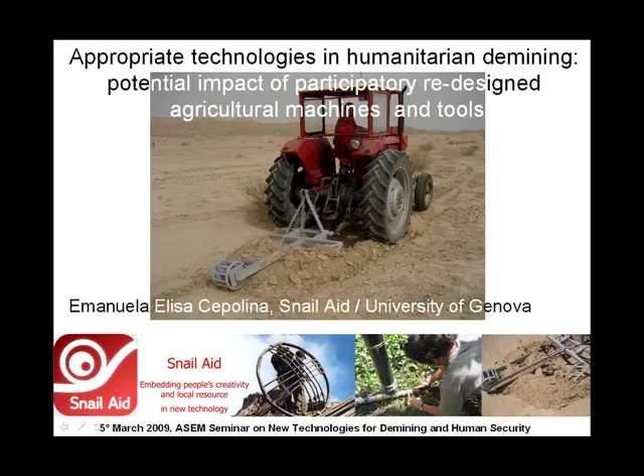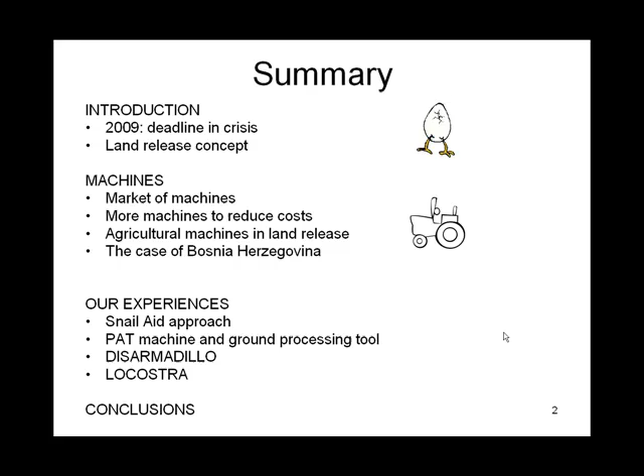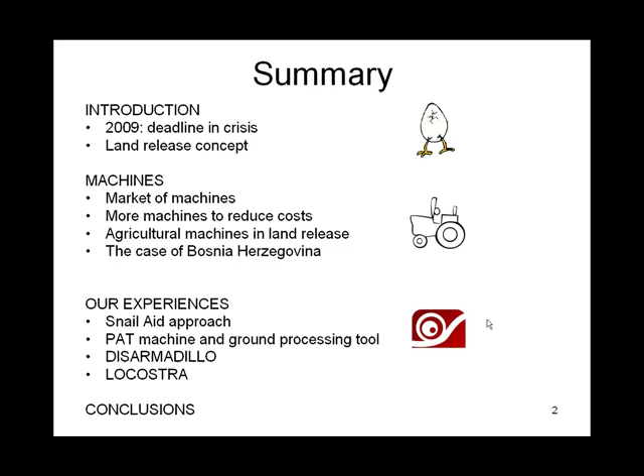The title of this presentation is Appropriate Technologies in Humanitarian Demining: Potential Impact of Participatory Redesigned Agricultural Machines and Tools. We will first see the newly conceived land release concept, then overlook what machines exist on the humanitarian demining technology market and how agricultural machines could be efficiently employed in land release. Then we will speak about our experiences in Genova, about the Snail Aid approach, the PAT machine that we developed and prototyped, and two more projects we have written and are waiting for funding to become available: Disarmadillo and Locostra. And then we will conclude.

2009 is a very important appointment for the mine action community, as it is the first Ottawa Treaty deadline for completing clearance. Therefore, the world should look like this, if all the countries that first signed the Ottawa Treaty in 1997 could have finished clearance activities. Instead, 15 of them, which is almost two over three of them, could not make it, proving that...

...targets set by the Ottawa Treaty were not too realistic, forcing these countries to cope with the landmine problem for much longer. At the same time, we are witnessing a widespread food crisis affecting many of the same countries that are also coping with the landmine problem, and this puts a lot of pressure on releasing land in a quicker and more efficient way.

Luckily, at the same time, we are witnessing a dramatic change from the requirement of clearing all mines and explosive remnants of war from suspected areas to the acceptance of a residual risk after clearance. This is a very wise approach, as even when the most expensive and dedicated equipment is used to process land, nobody can state that the processed area is really free of any explosive device.

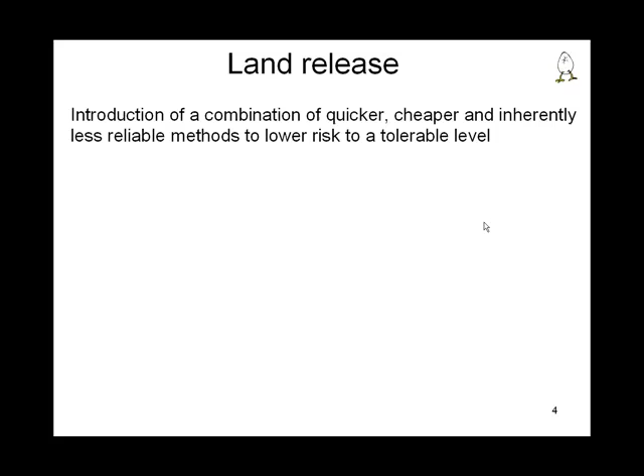Therefore, we can introduce a combination of quicker, cheaper, and inherently less reliable methods to approach the problem in terms of risk management. The land release concept aims to use sophisticated and very expensive equipment to clear only where the landmines are, which is generally only 3% of the entire area, and process the rest just by gathering and managing information through general survey and technical survey.

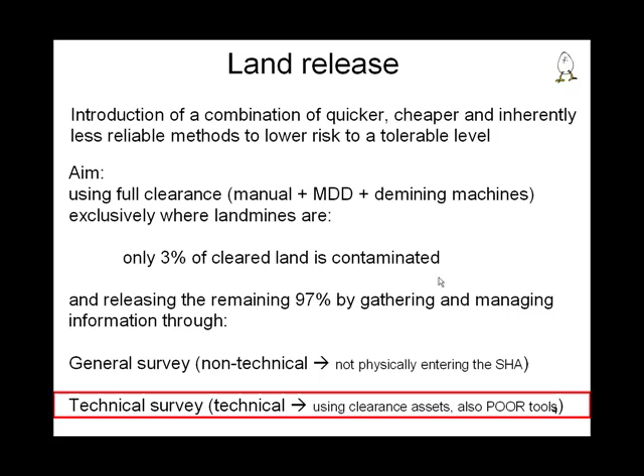Technical survey involves the use of some clearance assets and some technology. Machines available on the humanitarian demining technology market are generally heavily armored, highly powered, and high-cost equipment. The high cost can be due to the fact that these machines are sold on a market which is not a traditional one, but a military-like type, and prices are negotiated in confidence and therefore are not always clear.

The fact that these machines are very high cost can also be due to the strict requirements according to which they are designed. If we think about the performance test as described in the CEN workshop agreement, it foresees that the same machine withstand 450 landmine explosions in the same trial. This leads to very limited production: only 650 machines are operating worldwide according to the GICHD catalog, and these machines are also complex systems because they have to address the biggest variety of scenarios possible.

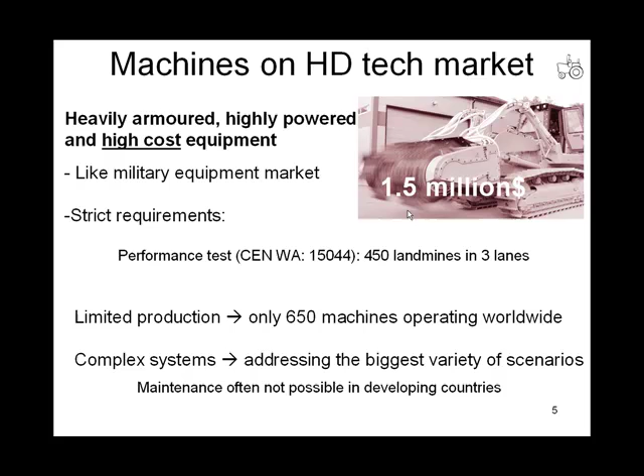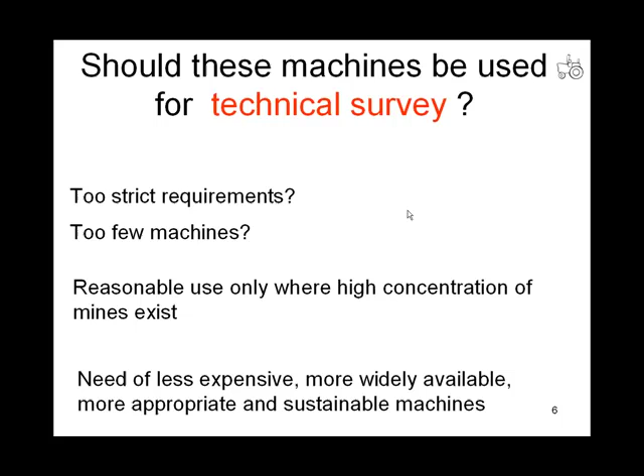Therefore, I'm wondering if these machines should be used in technical survey, because maybe requirements are too strict and the number of machines is too small. So their use can be reasonable only where there is a high concentration of mines, while we need to research into less expensive, more widely available, and moreover more appropriate machines specifically targeting technical survey.

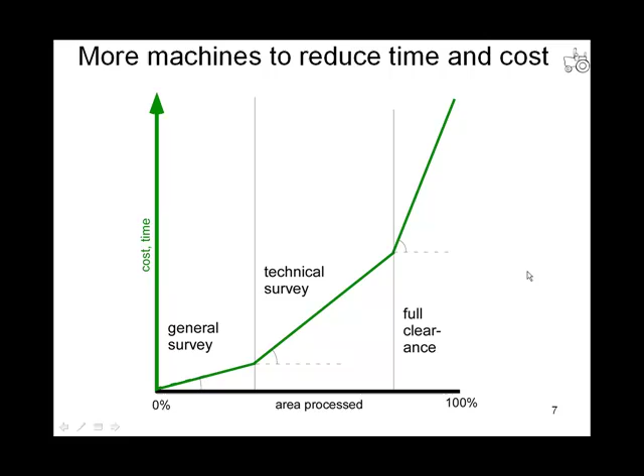We can also associate to the same graph the risk left over after these activities are completed. To full clearance, we associate a minimum risk left over, as the confidence in which the land is released is higher. And to general survey, a maximum risk left over.

By increasing the number of machines used in technical survey, we can shift this vertical line a little bit further, and keep on using technical survey to process a bigger area. This leads to savings in cost and time, as well as an increase in medium risk area left over, which is not a problem, because in the long haul we can process more land at the same time.

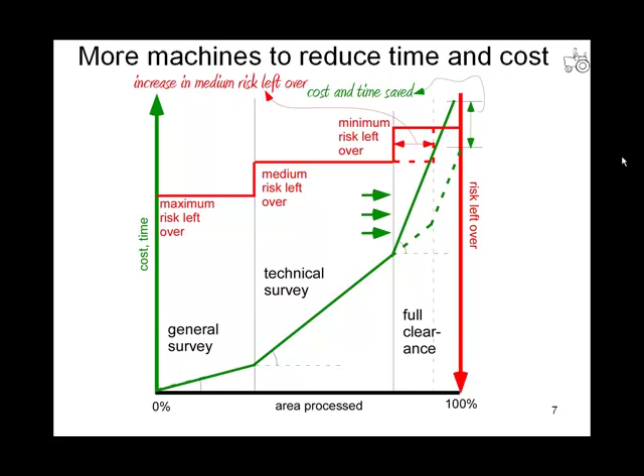So my argument is to use agricultural machines for technical survey, and these are the reasons: because agricultural machines are originally conceived for ground processing.

They are largely available and easy to repair. They can be reconverted to original use after clearance. They are mature and modular, and they can help relocalization, which is happening in every field and also in mine action, as programs are handed over to local communities.

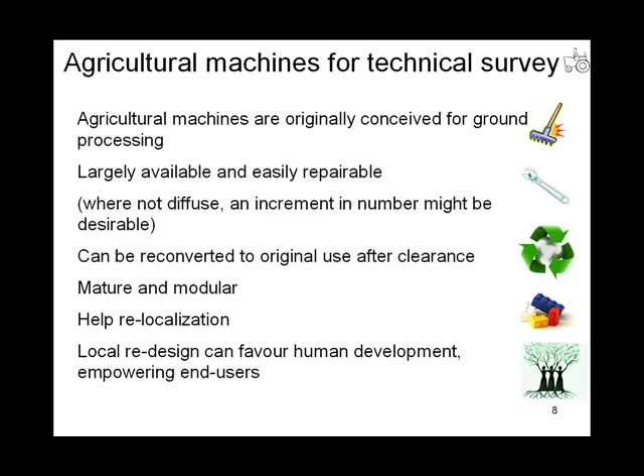Moreover, local redesign of this technology can favor human development, if we define human development as achieved when human needs are provided and human capabilities are developed.

If we look into the etymology of the word technology, which comes from techne, art or craft, and logos, meaning not only the result of the process that leads to a new technological object, but also the knowledge behind it and the knowledge of how to use it, we can see that there is a strict link between human development and technology. Any technological change can build up human capabilities, which in turn creates knowledge, and creativity brings again to another technological change.

At the end, this results in economic growth.

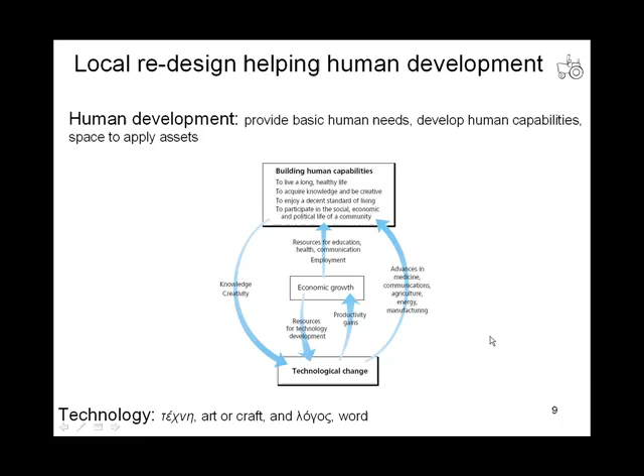So, to adapt agricultural machines to technical survey, we need to modify these technologies. Requirements are very simple, as we just need to process ground at constant depth, and we have to design these machines to withstand at least one explosion without being severely damaged, and we want to keep the operator safe.

So there are several fields in which we can research. First of all, ground processing tools to be attached to standard linkages, or even animals where machines are not available.

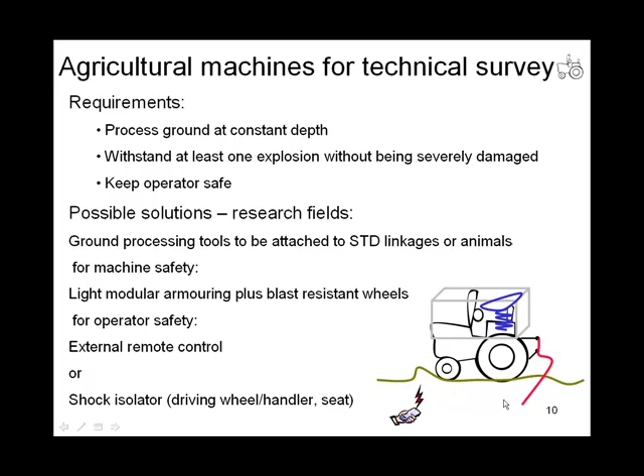Then we have to keep the machine safe by providing armoring and maybe some blast resistant wheels. And we have to protect the operator by providing remote control, or if the machine has to be operated on board, by devising some special shock isolators.

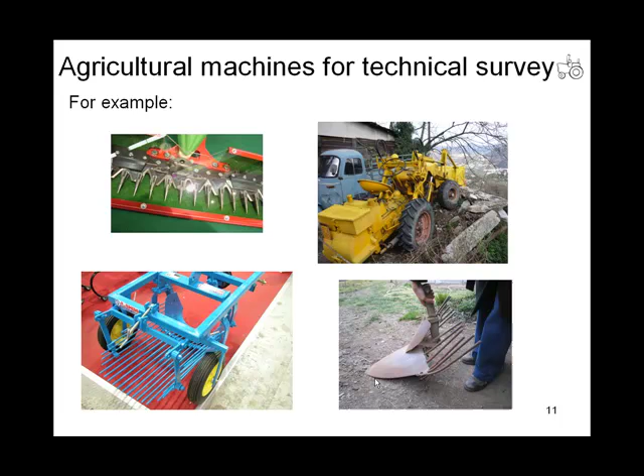These are a few examples of what is available on the agricultural market and can be readily employed in mine action, especially potato diggers. So I'll give an example of Bosnia-Herzegovina, where in 2007, 170 square kilometers of land were released using 21 machines.

This means that every machine had an average productivity of 8 square kilometers. There are still 1,700 square kilometers to be cleared. So if we look into the population of tractors available in Bosnia, which is 30,000 units...

And if we assume that each one of these tractors, opportunely redesigned to address technical survey, has the same productivity as one of these 21 machines, while using only 300 units, which is only 1/100 of the tractors available, we could potentially solve or dramatically reduce the problem in less than 1 year.